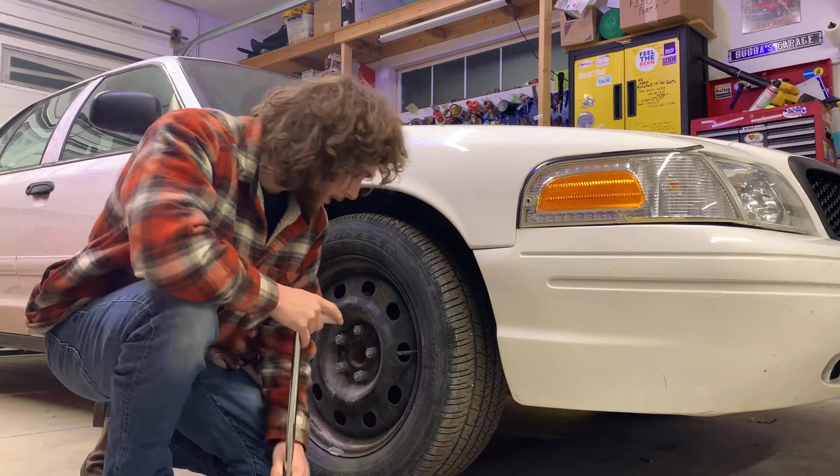Alright guys, so now we got all of our hubcaps off, we are ready to start breaking some of these lug nuts just a little bit loose so we can get them off without the tire spinning when the vehicle is actually jacked up in the air. So we'll go ahead and get started with this wheel right here. The tools I'm using are just a 1/2-inch breaker bar and a 21 millimeter socket for this specific vehicle. That one was a little more tough.

Alright, and now we got that first one, we got all the bolts cracked for it. We'll go ahead and do that to the other three as well here. Alright guys, so I got this passenger side broke loose here. I'm going to do a different method for the driver's side to also show you guys some other ways you can go about doing this. But our next step will be to actually jack the vehicle up.

So I went ahead and lifted up our rear axle with a jack just under that diff pan. So we'll go ahead and throw jack stands underneath both the axle tubes, and then we'll lift up the front. We got the rear end lifted up here, so we'll go ahead and lift the front end just right underneath the frame rails. That's where we will also put our jack stands.

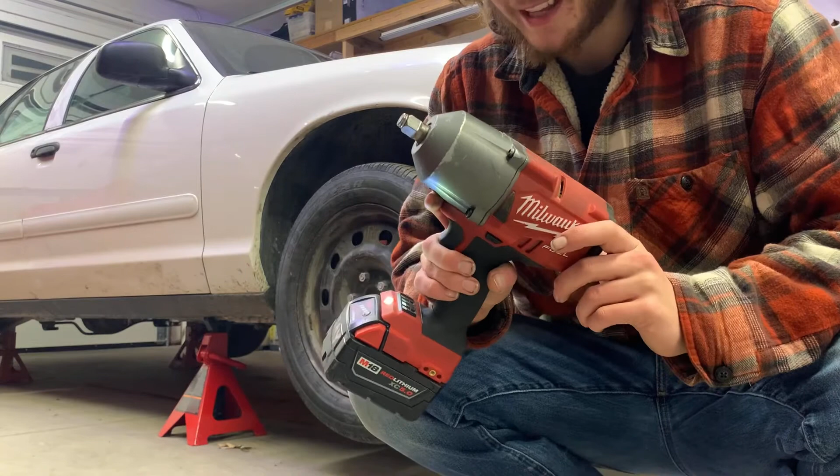Alright, guys, so this is going to be our second method. It's definitely a lot easier. Just a 1/2 inch impact. We're going to go ahead and get those driver side tires off here, and then I'll show you guys the way with the ratchet for this other side, just so you get both perspectives.

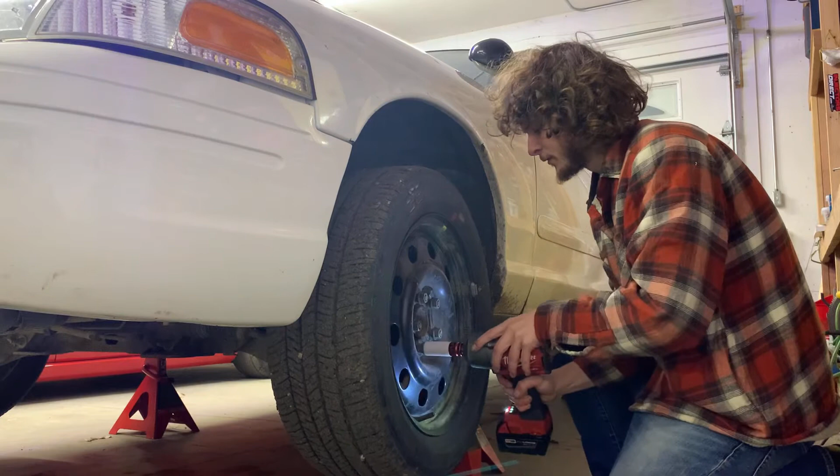All right guys, so here's our second method. We'll go ahead and get started here. As you can see, that's a lot quicker. We'll go ahead and get that back tire as well.

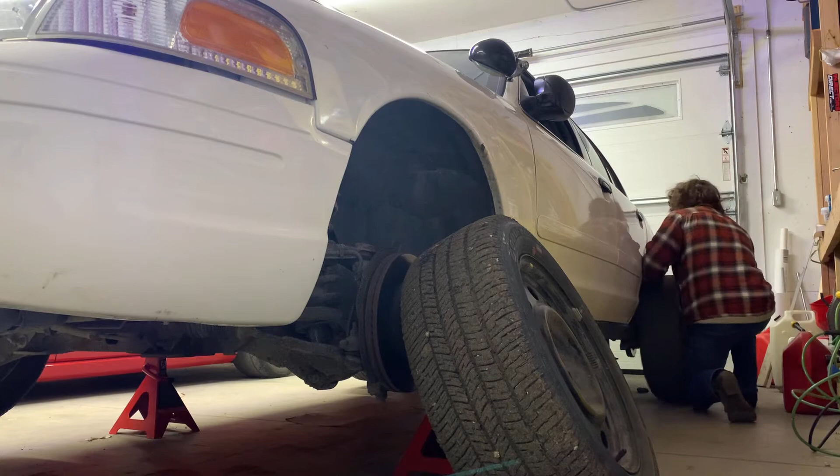All right guys, so we got these tires off here. We can go ahead and just pull them right off. Sometimes they're a little stiff, you'll just have to give them a little pound, then they should break loose. And then just straight out with it, and we'll go ahead and rest this against the caliper and rotor for right now. Do the same thing with the rear, give it a good pound and it should come loose. I'll get back to you guys with the other side with the ratchet here.

All right, guys, so I'm back with our ratchet here. We'll just go ahead and get these loose. We might honestly not even need our ratchet, to be honest with you guys here. Honestly, these are just hand loose. So we'll just go ahead and break them off with our hands.

This one's a little more stubborn. Get all our lug nuts off this tire. There it comes. And we'll just rest them up against the hub again here. We'll go ahead and get that back tire as well.

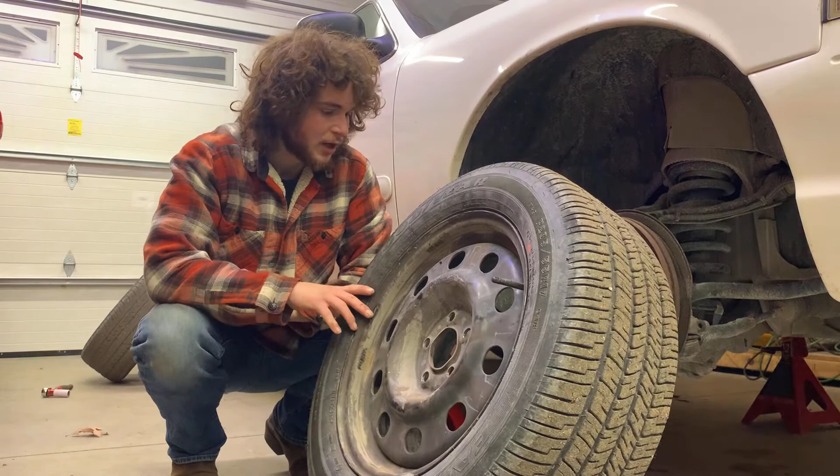Alright guys, so now we're ready to actually start our rotation process here. There's quite a few ways people do it differently. How I do it is I crisscross the powertrain tires. In this case, we've got a rear-wheel drive vehicle.

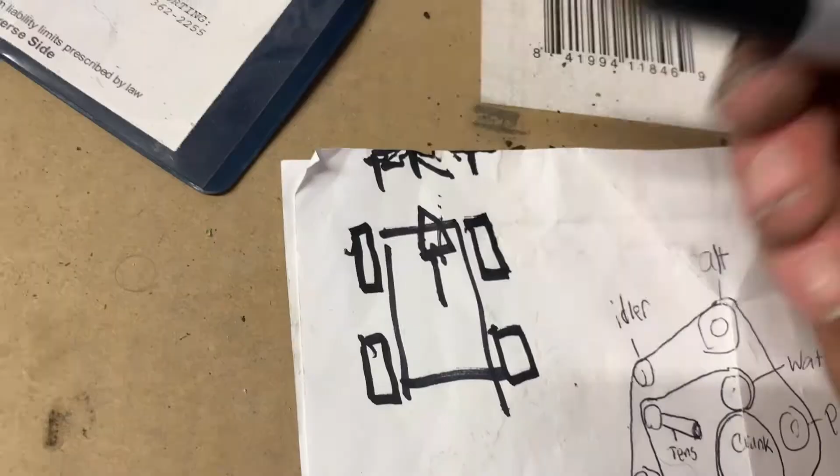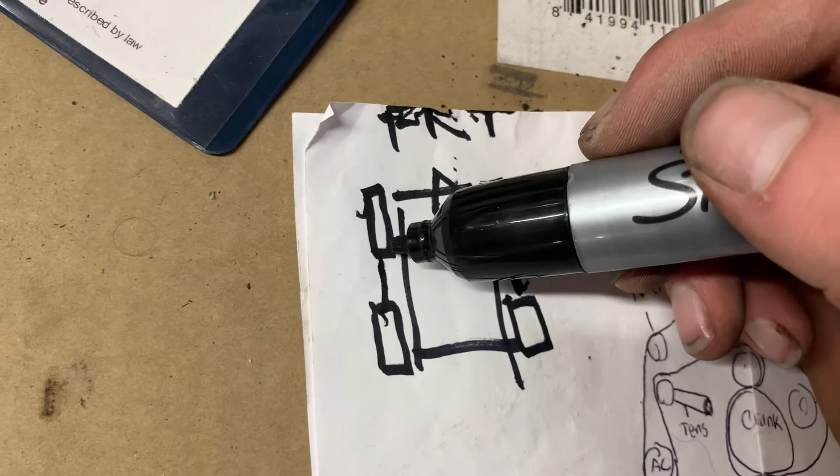So these front tires, this one that came off of this hub, will be on the back driver's side once we're done. I'll run them down with you guys and show you exactly what I mean. So there's our 4 tires, front of the vehicle, back of the vehicle. Right now we're going to move these back tires straight forward, and these front ones are going to crisscross to the back. Does that make sense?

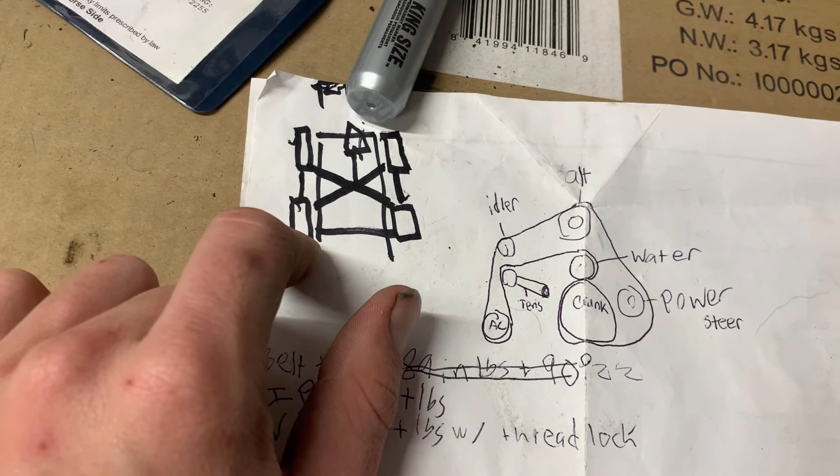So alternatively, our front driver side will be back passenger side, our front passenger side will be back driver side, our back driver side will be front driver side, and our back passenger side will be front passenger side.

Okay guys, so if you have a front wheel drive vehicle, you would crisscross to the front - basically the opposite of this procedure. If it's all wheel drive, I usually do an X with that, so all the tires would crisscross.

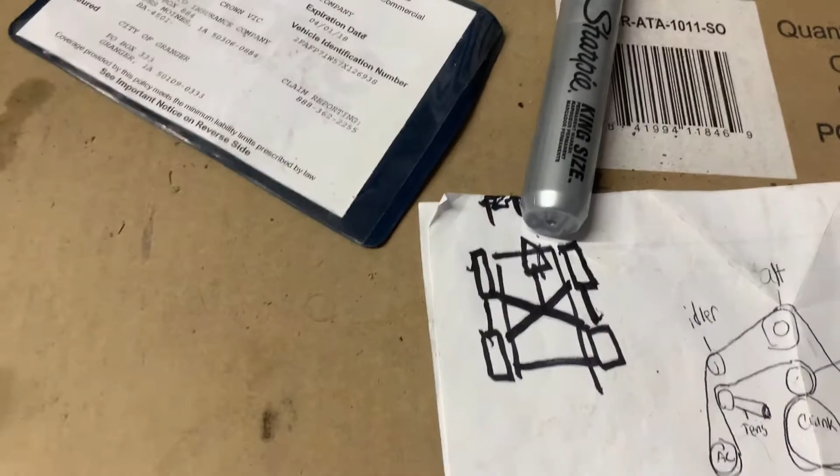But you also have to watch out if your tires are rotational or directional. You cannot do crisscross with directional tires. Also, if your vehicle is like the Mustang, where it has wider tires in the rear and smaller tires up front, you cannot do a rotation at all, since it's directional with bigger tires in the back and smaller tires in the front.

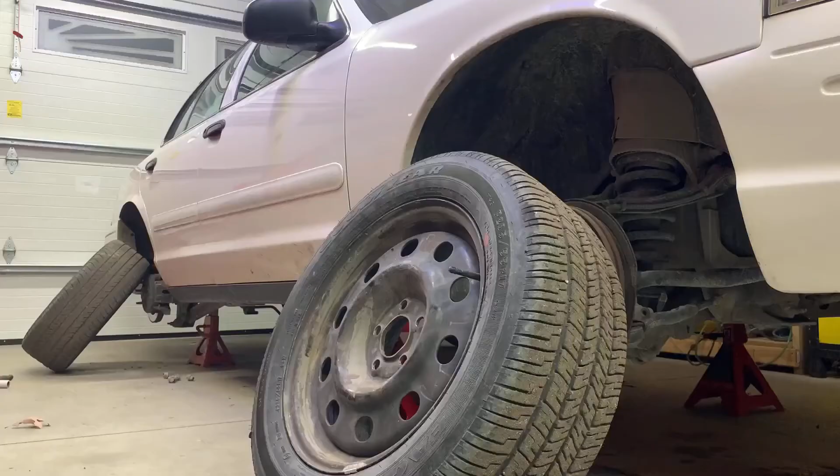So we'll go ahead and start moving our tires here. I usually also check for nails while I'm rolling it, so I'll just roll it slow and make sure there's no nails or anything that would cause a leak in the tire. Remember, this one is going to go to our back driver's side here.

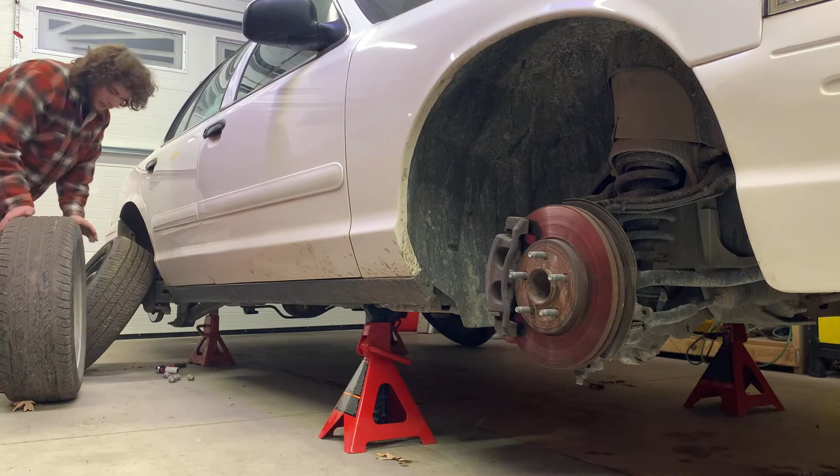Alright guys, so we got all of our tires moved to where we need to put them. We can go ahead and mount them on our wheel hubs now.

Sometimes, with some of the GMs, I don't know with the Fords as much, you'll have to push up and then inward to get it to actually sit flush on the actual wheel hub itself. I don't think these Fords have it as much, but I know especially the newer GM vehicles do.

Now I'll just do that same thing to all of our other tires, and then we'll get them tightened down.

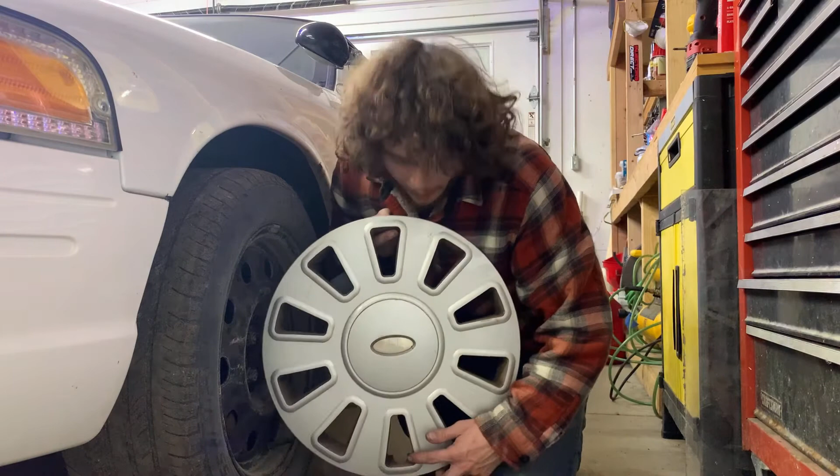So with these ones, how these work - you can see right there, there's a little groove for the valve stem, so we're going to get that lined up with the valve stem. And then once you get it lined up pretty good with these Ford ones, you give them a good little punch after lining them up, and it should sit in.

Then you just work your way around it. Make sure you get all the way around it, make sure it's all on there, and we'll go on to our next one.

Alright guys, I believe that should do it. After you get those hubcaps on, should be all good to go. Just make sure you retorque your lug nuts to the same torque spec that you did at our final stage there, within 50 to 100 miles after you do this, and you should be good to go.